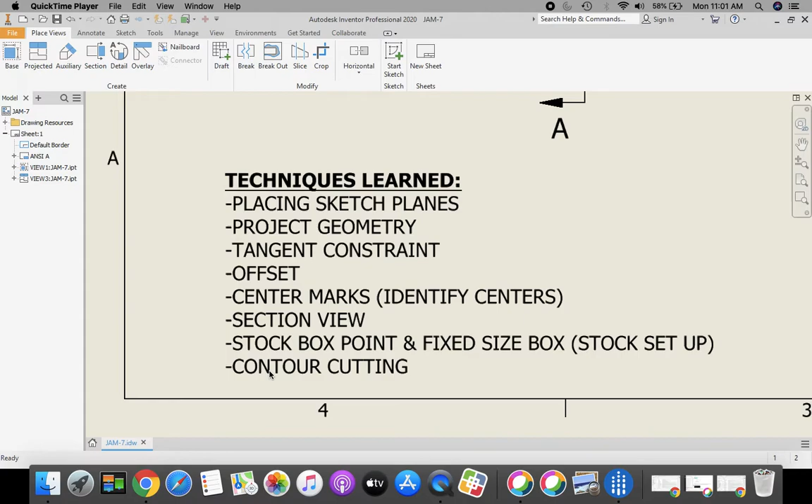Okay? Excited to do Jam 7 with you? Why don't you come along? We're going to start from our Inventor New window.

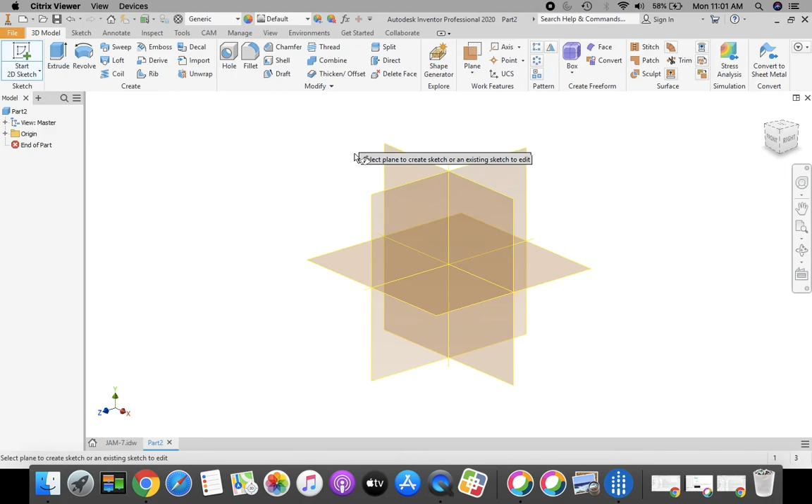We're going to select New from the ribbon bar at the top, Standard IPT, and click Create. As always, we're going to begin a new part with a 2D sketch on our XY plane, and click Front in our World View Cube.

We're going to start with those two circles. We have a 3-inch circle that we're going to place around our origin, and a 2-inch circle out here. Each one of these is extruded back 0.75. Can you see these dimensions on the drawing?

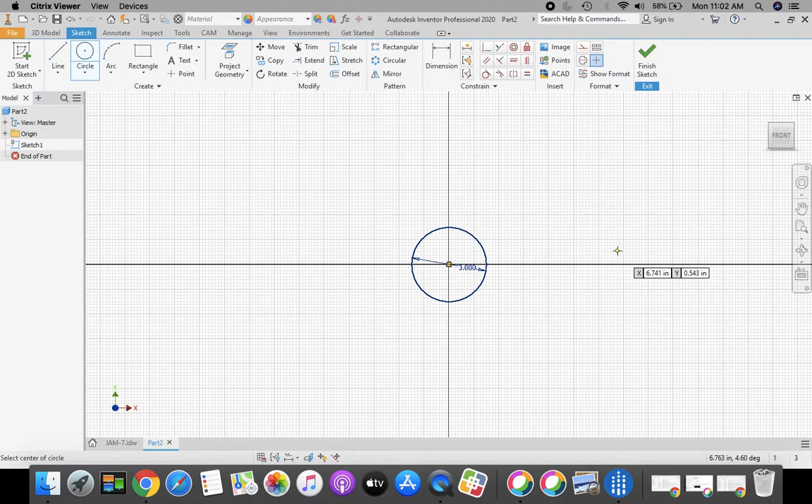Okay, going back to my part, I'm going to grab my circle tool, start from my origin. This circle is 3 inches, press enter on the keyboard. And I'm going to take over here to the right hand side, click another circle, and this circle diameter is 2 inches. Press enter on the keyboard.

Now we're going to constrain these two together. The first constraint we're going to put on it is a dimension, so I'm going to dimension from the center of my big circle to the center of the 2-inch circle. We want this to be 4.5 inches, so type in 4.5 and green check mark.

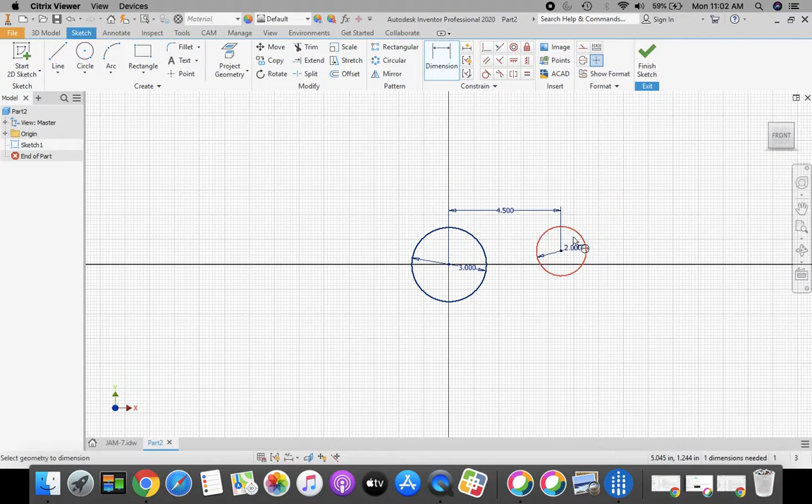The other constraint we're going to put on this is to make sure that the center of this circle at our origin is even horizontally to this circle as well. So we're going to come up to our constraints next to dimension, and find that horizontal constraint that looks like a feather going horizontal with three little lines coming out of the bottom. We want to click the center of our 3-inch circle and the center of our 2-inch circle, and that's going to line them up horizontally.

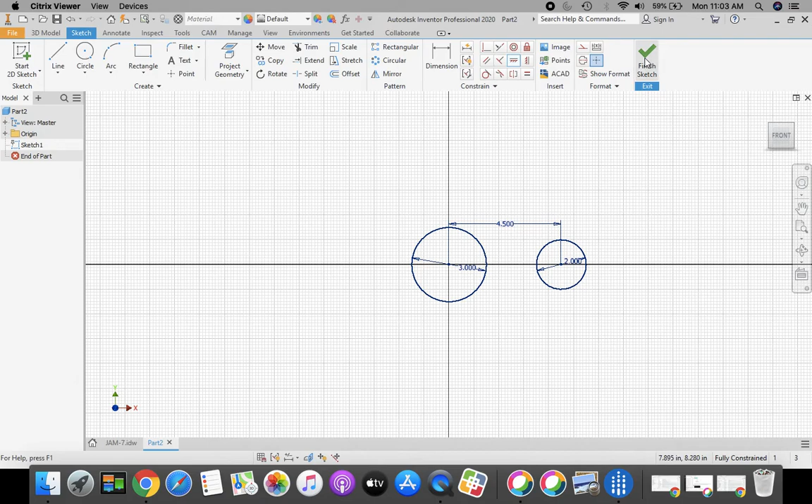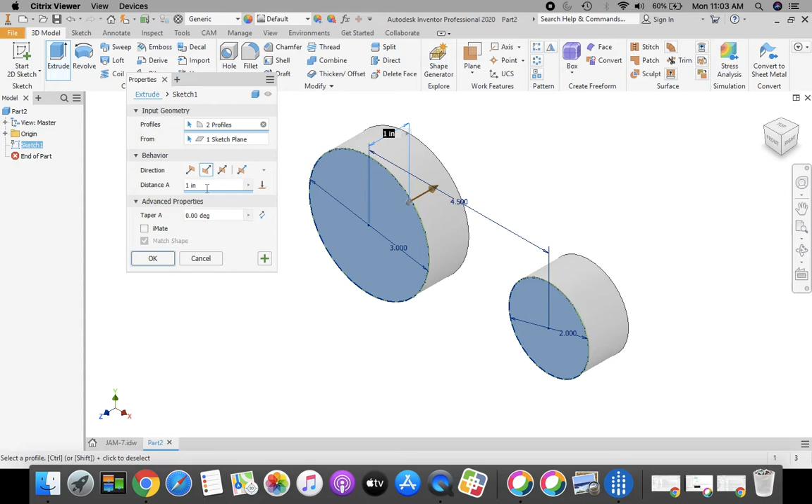Next, green check mark, finish sketch, go home, and now we're going to extrude. We're going to select both of these circles, extrude in a flip direction, and extrude a distance - taking a look at my drawing, 0.75. Going back to my part, we're going to enter a distance of 0.75, and then click OK.

Next, we're going to create this platform on the back that connects the two circles together. Then we'll come back and do the rib and finish off with our circles. If we take a look, these lines coming down are angular and connect the two together, and we're going to connect them with those tangent constraints. Something new for us, so pay attention as we go through.

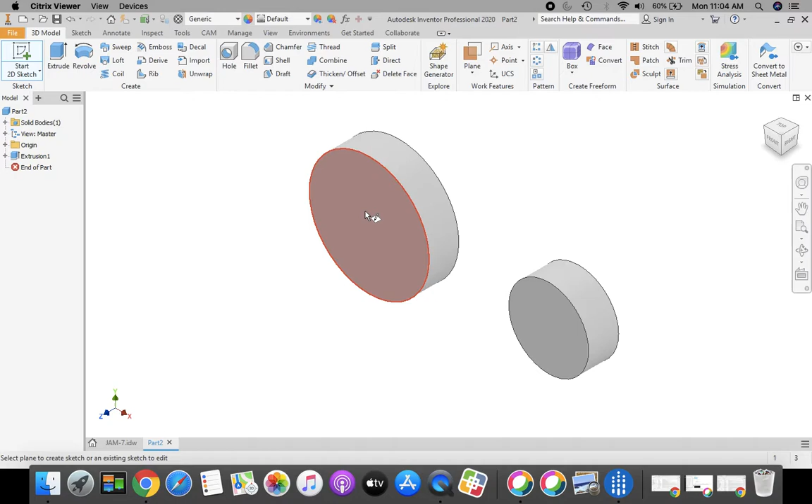We're going to take a 2D sketch, and I want to place this on the back of my part. Usually we've been placing our sketches on the front, the right hand side, or the top. Here we're going to highlight the back of our part and click to select it.

Now what we need to do first is project the geometry from these two circles onto this sketch. So I'm going to project geometry right here, and click the big circle and the little circle to project that geometry onto there.

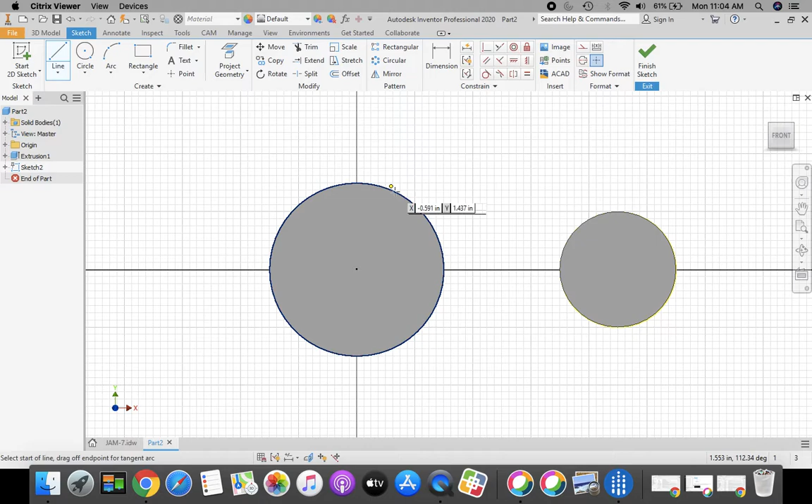Next I'm going to get my line tool, and start on the curve of the circle to create my line. Please don't lock on to the 12 o'clock position of this. You want to be off of that snap on the 12, and be on the curve or the arc of the circle.

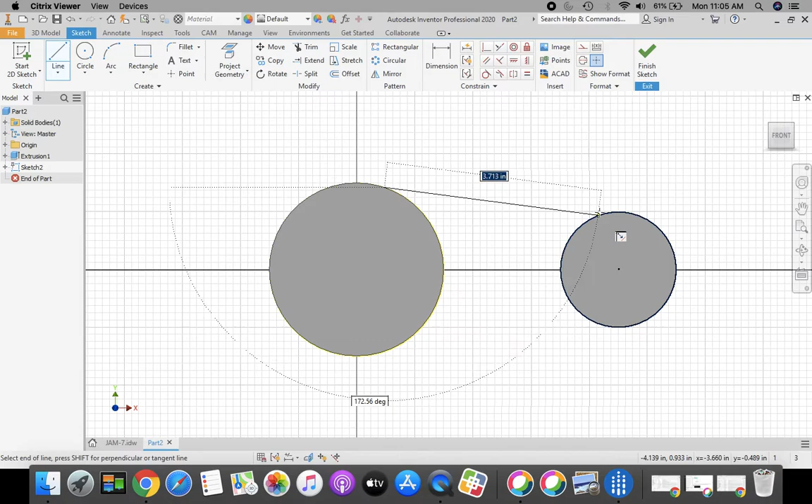And I want to come down and do the same thing to this smaller circle. Make sure you're not locked onto the 12 o'clock position of that circle. Okay, and do the same thing for the bottom - don't lock onto the 6 o'clock position on these.

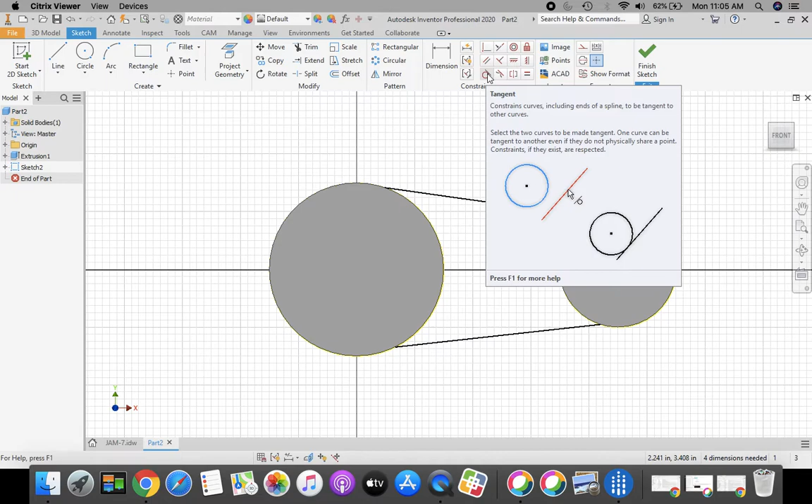Once we have that done, now we're going to make these lines tangent to the circles. We do that by coming up to our constraints here, and selecting our tangent constraint - this one right here that looks like a circle and a line as a hat. I want to click my line and the big circle, then click the line and my smaller circle, and do the same exact thing to the bottom.

Okay, now I have these lines tangent to those circles. Now we're going to take the green check mark to finish the sketch, and we're going to extrude.

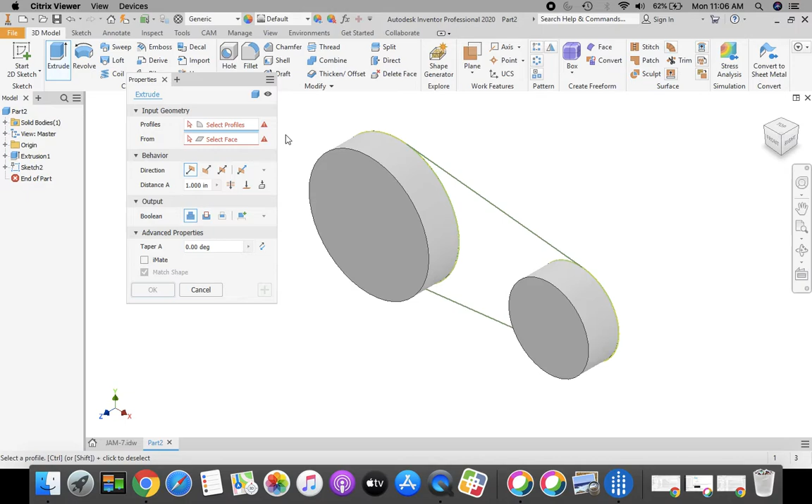Another important feature we used when connecting those lines and projecting that sketch or geometry is this: if we didn't project our geometry, when we go to highlight this area to select it and turn it red, it won't turn red, because we don't have the curve coming down from this circle.

So if you didn't do that, you'll have to go back, project your geometry onto this sketch, finish your sketch, and then you'll be able to move forward like we are.

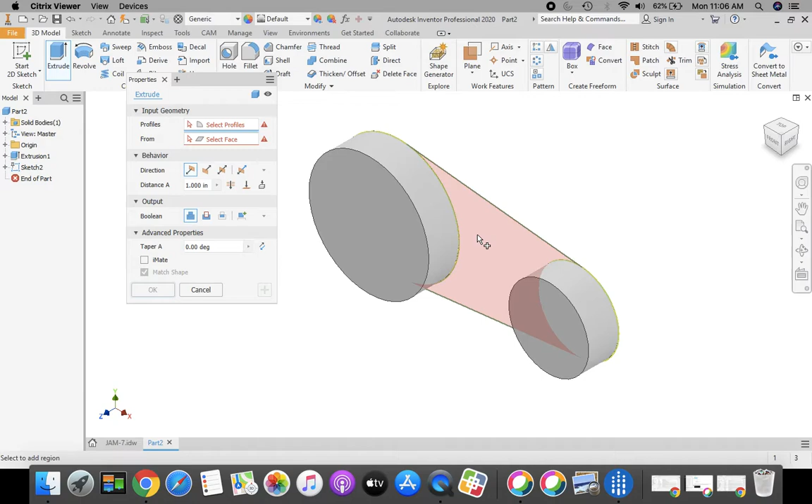Once that turns red, click to select it. Obviously that's going in the wrong direction, so let's flip that around. And I want the thickness of this — let's take a look — it's 0.375.

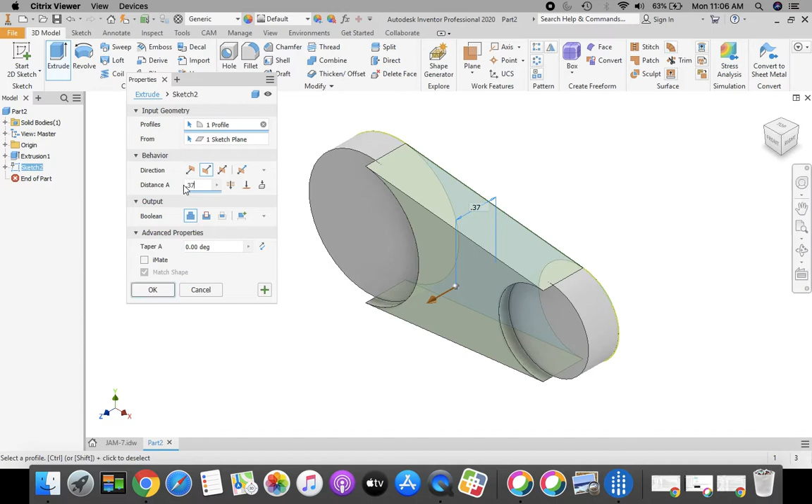Okay, so going back to my part, I want to enter in a distance right here of 0.375. And select OK.

Excellent. Next, let's take a look at placing this strengthening piece. It's kind of like a rib down the middle. Okay, let's take a look at doing that.

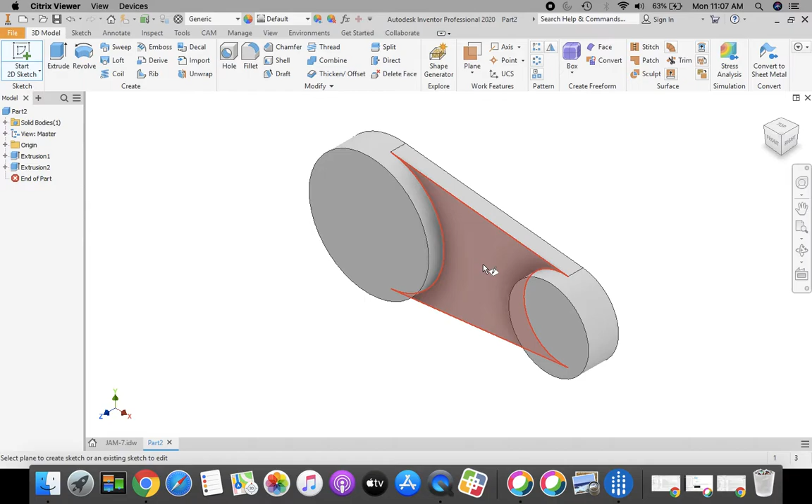We're going to once again start a 2D sketch, and we're going to place this on the front of that little platform. Click front in your world view cube, or the magnifying glass piece of paper to zoom all, and we're going to create that with our line tool.

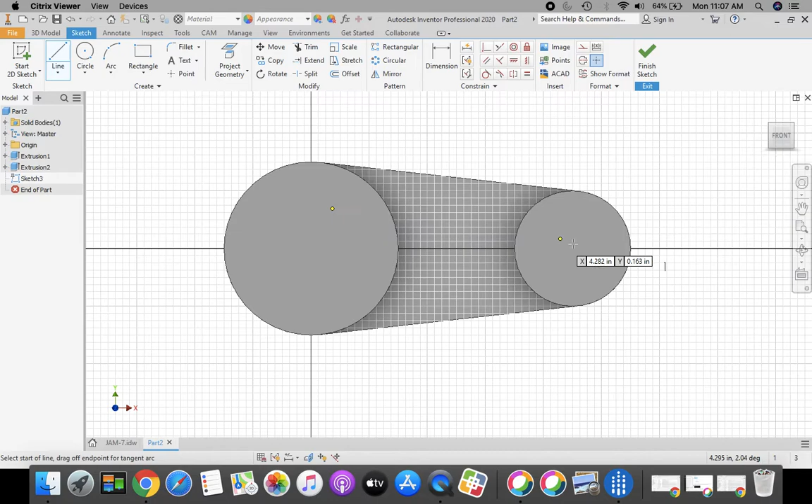Now the first thing we want to do is project our geometry onto here, because I can't select the center of my circle. Okay? So what we're going to do is project our geometry, grabbing each one of these circles.

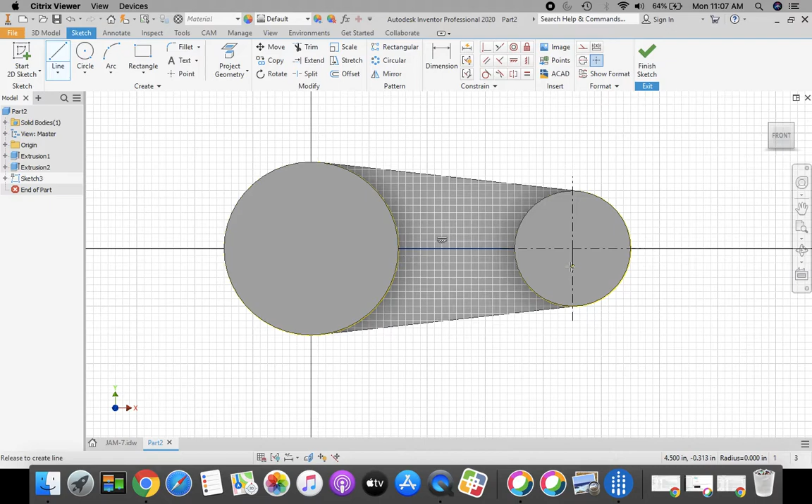Then I'm going to get my line tool and snap onto the origin. When I get my green dot, I'm going to sketch this out and snap onto the middle of the other circle. Okay? And then press escape.

This is where we're going to use our offset command. We're going to offset that line on either side. If you take a look right here in our drawing, we're going to offset down 0.25 and offset up 0.25, so this whole rib is a half inch thickness, or half inch wide.

So now we're going to use that offset command, and I'm going to offset this line going up. Make sure your cursor is in the up position, 0.25, enter on the keyboard. We're going to take that center line again and offset it going down.

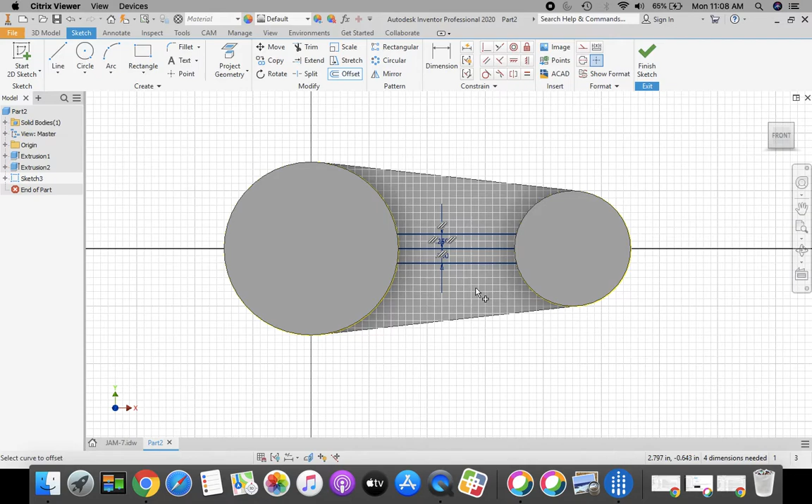0.25, enter on the keyboard. Green check mark, finish sketch.

And before we extrude this, let's go back and take a look at our drawing. On our drawing, the height of this rib right here is 0.25, so that's our extrusion. So I'm going to extrude, and I want to select that bottom feature first, and then the top one.

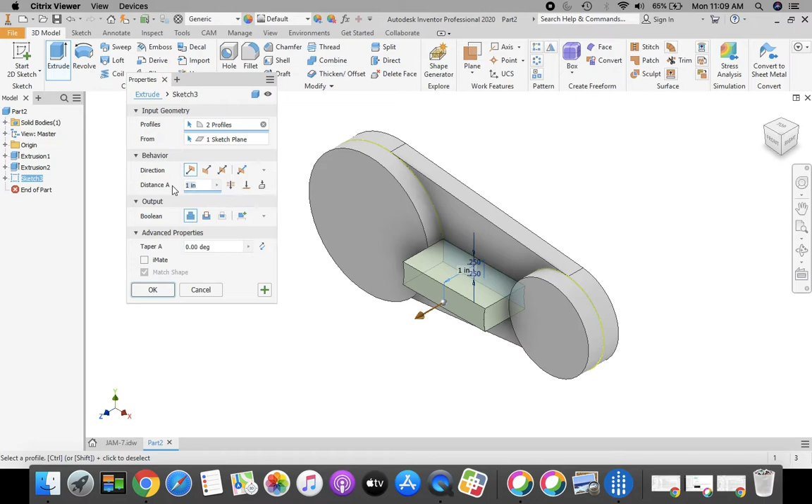We'll extrude them both together, and it's going in the right direction, so we don't have to flip it. But we're going to enter in 0.25 for my extrusion distance. And click OK.

Next, we have to take care of these holes. The holes are in the center of each one of these circles. They're 1 inch in diameter and go all the way through. Let's take a look at creating those.

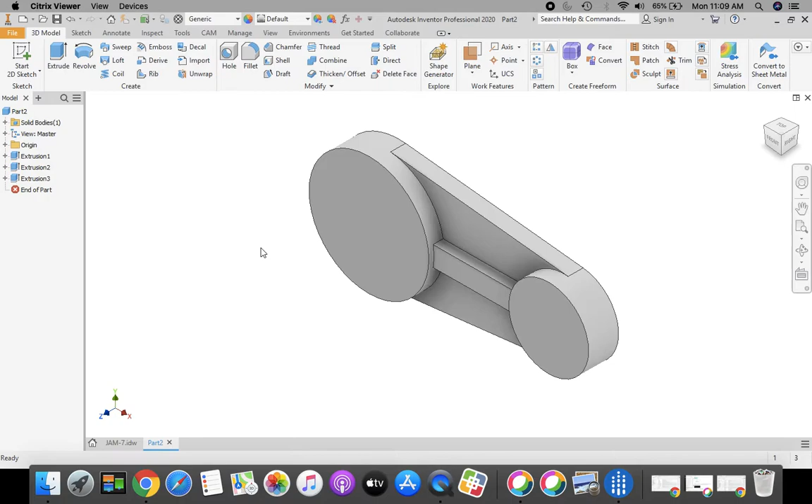We're going to take our 2D sketch and place it on the top of our circle. Click front in your world view cube, or the magnifying glass piece of paper to zoom all. And what we're going to do is project my other circle onto here.

Let's see if we can get it first, so I'm going to take my circle tool. You see how I can't get the center of that circle to highlight? So I'm going to press escape and project my geometry.

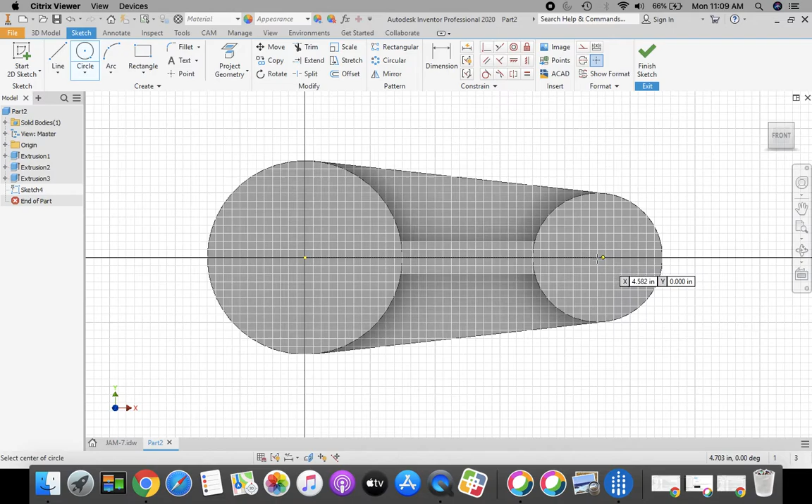I want my circles to come up to this sketch plane. Now I'm going to get my circle tool, and I'm going to click the center of that circle. This diameter is 1. Press enter on the keyboard.

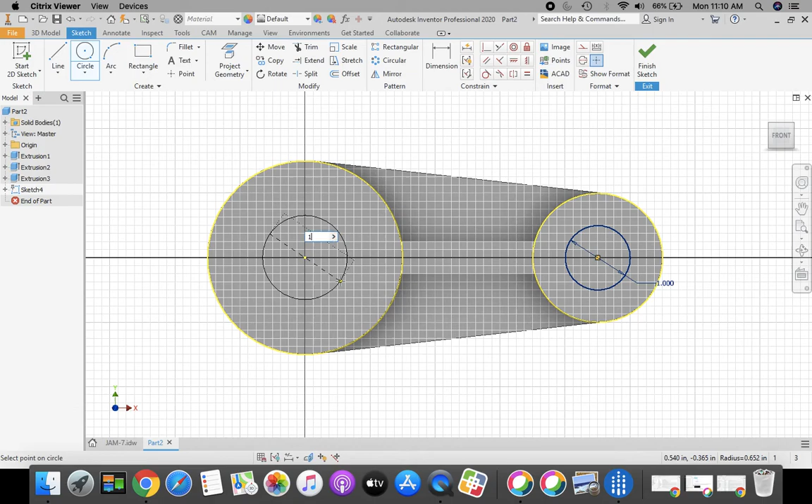I'm going to get the center of this other circle. When it turns green, click and stretch out a 1, enter on the keyboard. Okay? Green check mark, finish sketch.

Now we're going to extrude. Here we have to select both of these circles. You're going to have to move your cursor around until that circle highlights red.

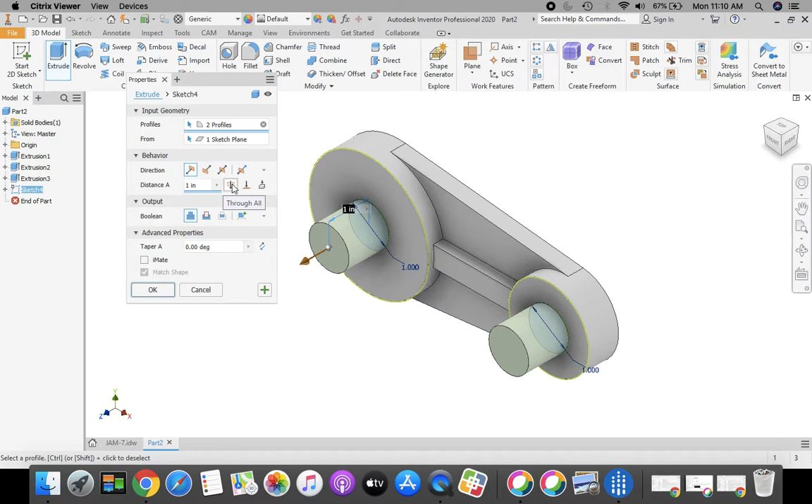And this is going to be an easy one for us. We don't have to enter in a distance; we're going to make it go through all. Looks like the arrow going through the pancakes here. And then select OK.

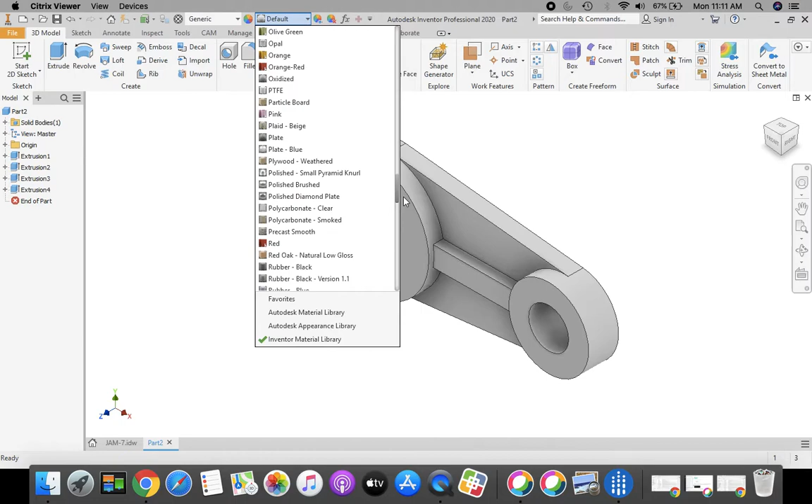Great job. This part looks almost finished. Let's go up to the top, above our ribbon bar, above our tab line, and change default. Click on the area here, and we're going to select violet, towards the bottom in the V's, for our material.

Once you're done with that, let's go up to the orange file icon in the top left-hand corner of our ribbon bar. Let's go down to Save As. We're going to put this into our H drive. Click on the pull-down menu all the way down to the bottom.

First initial, last name, 000, the gray box with the green line underneath it. And we're going to call this — so this part is JAM-7, then type your last name. Click Save.

Great job. Next, in the next video, we're going to show you how to run the tool paths in order to cut this. Looking forward to seeing you there.